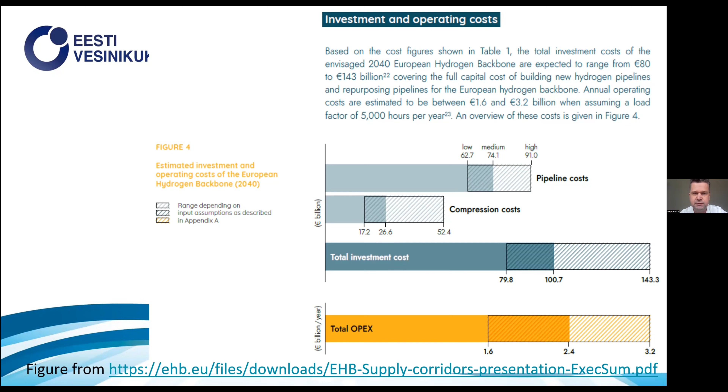In addition, there is now a lot of discussion about how much more expensive it would be to transport this large-scale energy in the form of electricity through cables. Different calculations and webinars propose that it's about 10 to 20 times more expensive to set up electricity transport infrastructure.

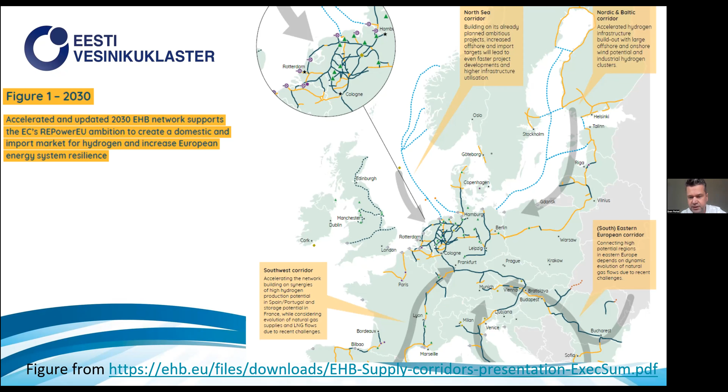Based on this, it seems quite clear that the large-scale energy transport from those areas towards Central Europe should be in the form of green hydrogen. Guidehouse, based on the European Hydrogen Backbone project, which contains approximately 30 gas TSOs across Europe - and from Estonia, Elering is the partner there - have proposed that already in 2030 there could be several hydrogen pipelines that help transport large-scale energy from those areas towards Central Europe, Germany, to support the energy independence and security of Europe.

Now, this was the big picture on the large scale. So if we know that this type of large-scale energy production will happen in Estonia, and hydrogen is the most cost-efficient way to store this energy and use it later on, then what we can do in Estonia is start to figure out how hydrogen can be used in our local context.

This means development of full value chains, where on one hand we have green energy production, electrolyzers, hydrogen storage. Hydrogen can be transformed into different e-fuels, for example sustainable aviation fuels or other types, ammonia, methanol. Then there's storage and transportation - how to get hydrogen from one point to another - and then there's end use.

In the Estonian context, and also if we look at Europe and other places like Asia, one of the most common ways to start using hydrogen in a local context is buses. We know that in Estonia there's quite a bit of interest towards hydrogen buses in some places, and these kinds of full value chains, which contain green energy production and hydrogen buses at the other end, seem to be the first use cases in the Estonian context.

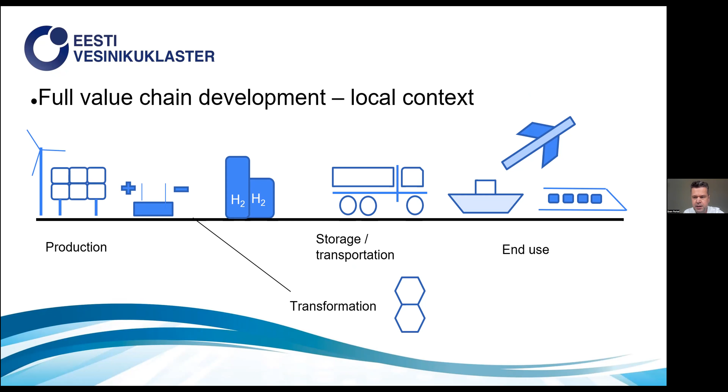But of course, maritime solutions are also interesting, and using hydrogen in aviation solutions has been discussed as well.

And based on this, over time we have proposed that to start the green hydrogen economy in Estonia, we should work with at least 4 green hydrogen full value chains at a time. Perhaps if there's more interest, also with other ones - but we see that Tallinn, Tartu, Narva, and Pärnu, and the islands that go with this, have been more interested in setting up green hydrogen value chains in general, especially Tartu, where there has been a lot of interest towards getting hydrogen buses on the streets as soon as possible.

And to understand that better, the cluster invited relevant stakeholders around the table, and we discussed what kind of value chains could we set up using the interest from those local companies.

At that time, we divided the stakeholders into 6 groups: production, transport and storage, end users, transformation, development of different hydrogen technologies, and of course, teaching of relevant competencies needed for setting up and maintaining a green hydrogen economy.

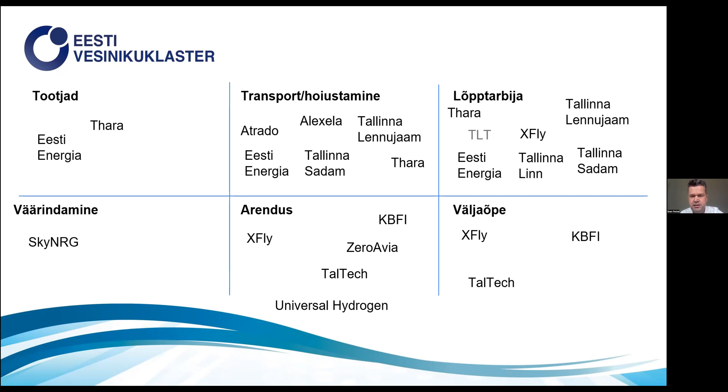We have done that also in other regions, for example in Tallinn, as well as briefly in Saaremaa. We see a lot of interest from companies, who realize that green hydrogen production, use, and participation in the full value chains is very relevant for their business.

Now we arrive at the discussion of how we're going to do this, because we are talking about a major change in how we produce and use energy in Estonia, but also on the European level. And these kind of big changes come with large barriers.

For this, currently more and more European funding is going into these projects, and Estonia has decided to support these projects with at least 2 investments. The first, 4.8 million, was tendered end of last year and won by Utilitas, who will use this funding to set up a full green hydrogen production and use value chain using their production facilities.

As far as we know, the use case here will be taxis, which will be put on the streets in Tallinn - green hydrogen taxis. The second measure, which should be opened end of this year, should give out 50 million to set up a full value chain, either in the transport sector or in industry. So this support funding will hopefully be available for Estonian full value chain developers quite soon.

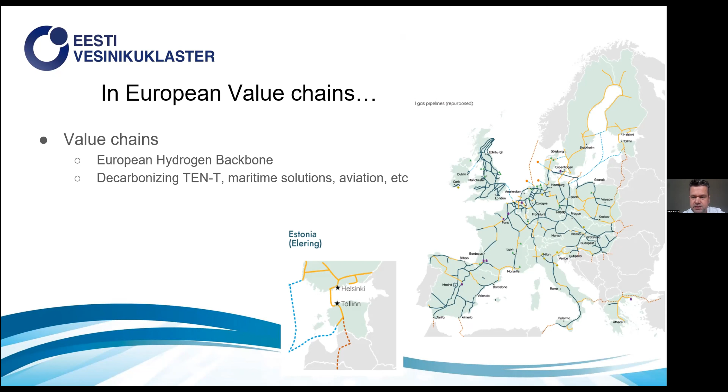There are also maritime solutions which will be decarbonized in Europe, and how to participate in that, and also in aviation, and perhaps other topics as well.

What we know is that a number of regions have shown a lot of interest towards setting up hydrogen full value chains already, as soon as possible - we're talking about Tartu, Tallinn, Narva region, and Paldiski and Keila have shown interest as well, in Pärnu and Kuressaare. Maybe the first users will not be in transportation, but stabilizing hospital work through hydrogen generators. But in general, the main focus will be on transport, and perhaps hydrogen buses and hydrogen taxis will be the first solutions.

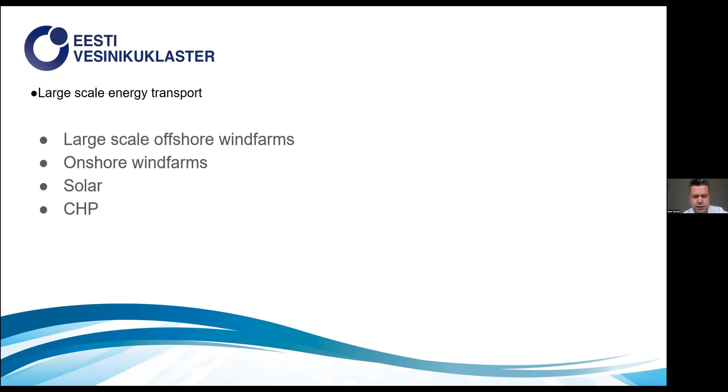So we have a range of options to produce green electricity and also to turn this into green hydrogen in the near future. When we're talking about local value chain developments and how those can be integrated into European value chains, we see that Estonia, the Baltic region, and the whole Baltic Sea area could become one of the areas which provide Europe with energy and participate in the energy security network. Developing a hydrogen valley based on this makes a lot of sense.

Hydrogen Valley is a flagship status given by Clean Hydrogen Joint Undertaking, and in some cases it may come with specific funding to develop this hydrogen valley and bring those value chains and companies together into a larger project, a larger development.

Altogether, there are over 30 valleys currently given out by the Clean Hydrogen Joint Undertaking, and they are evaluating those proposals as they come. Based on this logic, over the last year, we have jointly with the Finnish hydrogen cluster, powered by CLIC Innovation, developed and worked on a joint hydrogen valley between Estonia and Finland.

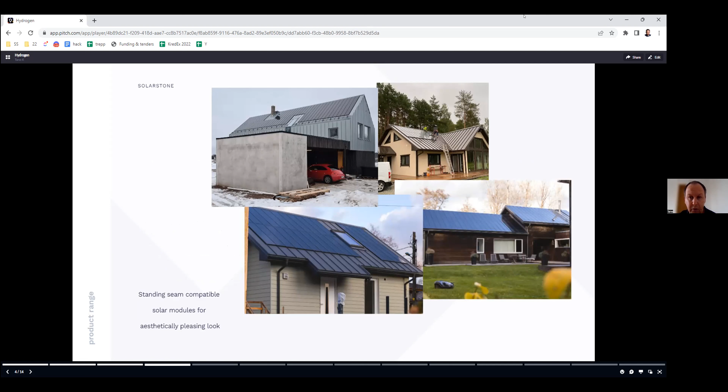We have 3 products in our portfolio. Firstly, an on-roof solution which is unique because it's not really on-roof, but very close to the existing standing seam roof. This product is enabled in, let's say, UNESCO and heritage buildings as the only solar option, because it leaves an almost natural look of the roof.

Then we have solar tiles, which are solar modules compatible with roof tiles, replacing the roof tiles while leaving the look of a natural roof, while actually the roof is made of solar.

The third product looks similar, except the modules are not the size of roof tiles, but large. In this case, we don't produce the solar modules ourselves, but have developed a certain framing set that is assembled around an existing solar panel. It doesn't matter which brand or size the solar panel is; this framing set enables us to turn a regular solar panel into building integrated roofing material.

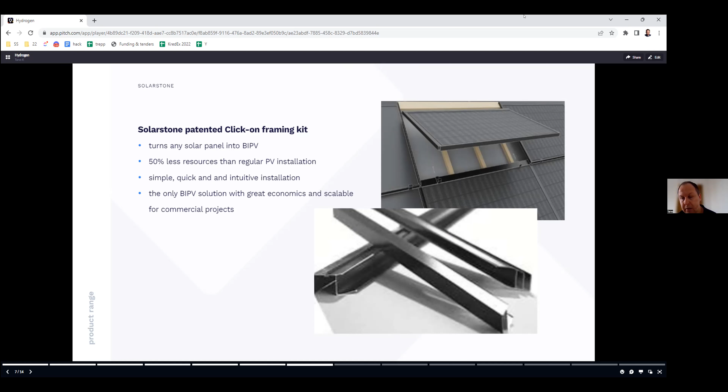It has great economics, probably the best in the world in terms of building integrated solar. This enables us to propose different kinds of solar-based solutions and business models on the market.

What I mean is, instead of installing solar where land is limited, we have a lot of existing infrastructure, like parking lots. We can turn parking lots multidimensional, meaning install solar carports and generate a lot of energy on site already.

Secondly, we've taken the structural hall model, which hasn't seen any innovation in the past 20 years, and replaced the traditional PVC or sandwich building skin with solar building skin, turning the structural hall into a large energy generating building.

The third is energy communities, where business models of pay and purchase can be replaced with services while using solar.

Speaking about solar and hydrogen, I think this is a very actual picture from recent times. What does energy security mean? You can produce energy somewhere far from where it's used, but if something hits, then you don't literally have energy, because it's not produced on site, it's produced off-site.

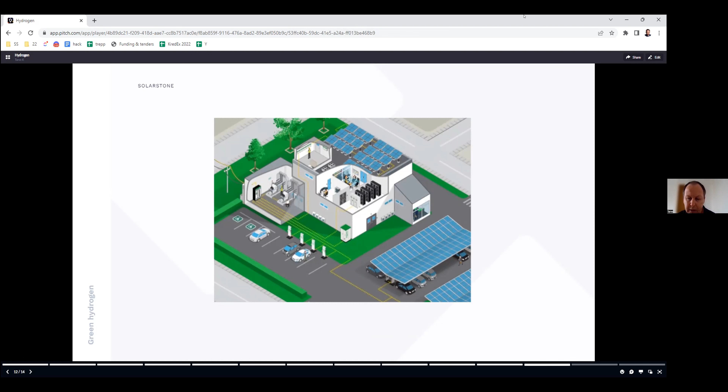It's of course a totally different aspect. I don't know the numbers yet behind compared to all the large utility scale wind, solar, and hydrogen combination projects. But again, as I started, we have a different approach than the general market has. The idea we are actually working on is to really use excessive solar energy on site for full year energy security and usage. That's pretty much it.

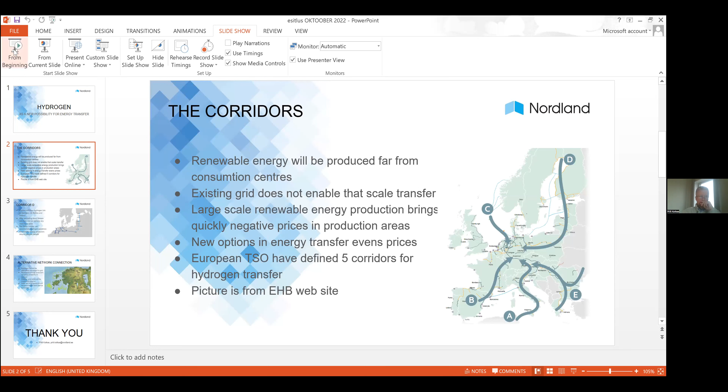I hope you see the files. As we worked during this process, Sven gave us an overview. We saw that the main challenge, or main possibility, for hydrogen in our corner of the world will be the possibility to transfer energy from our region to the regions where it is really needed. I'll show the same picture about the 5 main corridors and what exists today.

Apologies, we still see your first slide. Actually, I do see the second one. So what's the situation with others - do you also see the second one, or is it just me who sees the first? I see the first one also. We see your slides on the side, but it's not full screen. I'll stop sharing and do it once again.

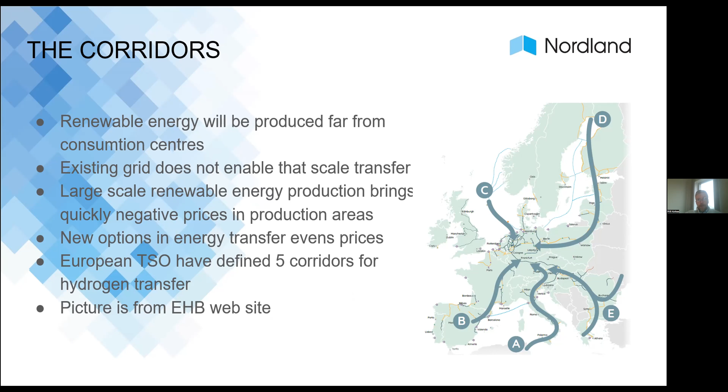I hope you see the second slide. Yes, we see the change.

We know that the same problem starts already from Finland, who is planning, according to today's wind park plans, at least 5 times more energy production by 2030. The same plans are in Estonia, the same plans are pretty much in Latvia and Lithuania. We also have our good partner Germany, who enjoyed Russian gas up to the year 2022. Today we are in the process of finding alternatives, and this is also a huge possibility for our region to provide this kind of alternative.

We have under planning, and in some stages under construction, an infrastructure corridor for railway - Rail Baltic. We have understood there is a possibility to use this Rail Baltic corridor for accommodating hydrogen pipelines. There were talks previously also about using a sea pipeline, after the Nord Stream explosion. This is probably an option for a pretty long period, but we have to have our energy connections and other inter-European connections in a mode that we can protect, with minimum possibility of sabotage. That's why this land corridor will definitely be the first alternative for this kind of infrastructure.

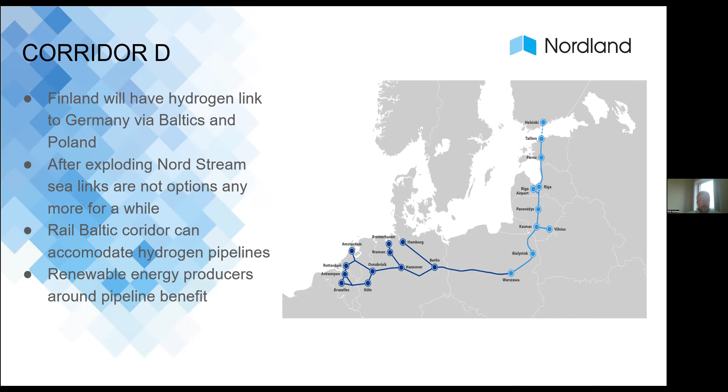It's also important that having the pipeline on the ground, going through regions with lots of interest towards wind parks and solar parks under construction, the pipeline will provide new possibilities for connection. It will be an alternative connection possibility for the producers.

What is good in the case of this kind of new energy transfer system is that we can send what we produce. We will definitely avoid negative prices in that case. And once we don't have wind and solar, we have a big hope that the pipeline works also vice versa, bringing us energy at a decent price.

So this is a quick overview of our findings during the last couple of years when we went through those local possibilities and tried to figure out the best usage of hydrogen in our region, where we don't have any industry using hydrogen. We believe that using it as an alternative network connection and transfer of energy will be a big chance for our region. So thank you.

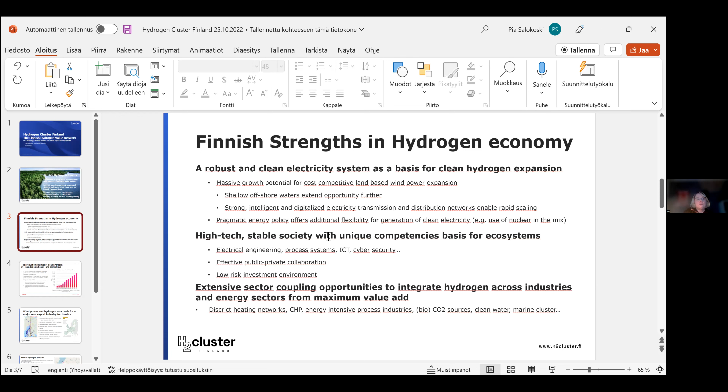But the potential for wind power is really big in the Nordic and Baltic countries, and also in Finland. Here are updated figures from that slide Sven showed. In 2030, there's already potential for 18 gigawatts in Finland, and most of that is still onshore wind. But of course, the offshore wind and increase of offshore possibilities will even increase these figures.

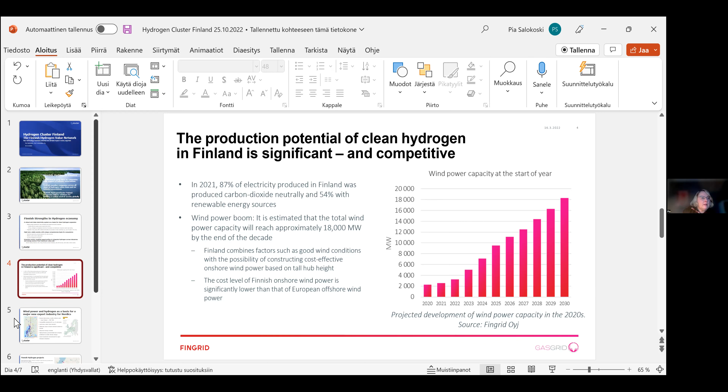And then those grid connections - there is already electricity and gas grid between Finland and Estonia, and there are a lot of different possibilities with these 5 corridors from the European backbone report, which have now been shown in many presentations. But when we made the calculations in the Hydrogen Valley project preparation, we noticed that the Baltic Sea countries can have a huge role in the whole European hydrogen economy and hydrogen market. So it's very important that we collaborate and work jointly, because there's really a huge amount of renewable energy and hydrogen production available in the Baltic Sea countries. And of course, collaboration on how to transport hydrogen from one country to another and how to utilize the hydrogen resources is very important.

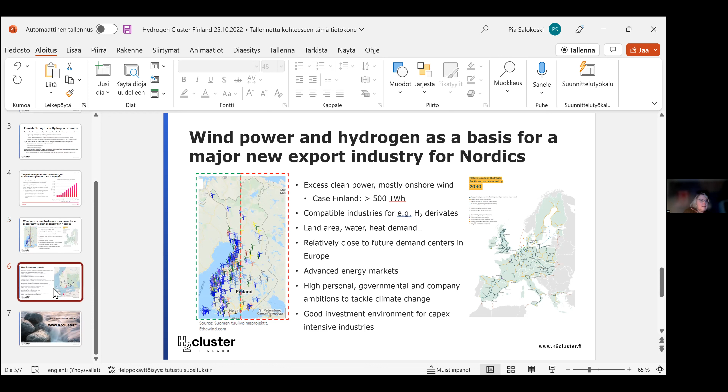Here you can see that most of the wind power potential in Finland nowadays is on the west coast and also the north, and the offshore possibilities are in the same area, maybe even more in the south part. But the Finnish hydrogen investment projects which are now ongoing are mostly in the south part of Finland. In the future, I see there will be growing amounts of hydrogen projects on the west coast and in the north, but nowadays most are in the south of Finland.

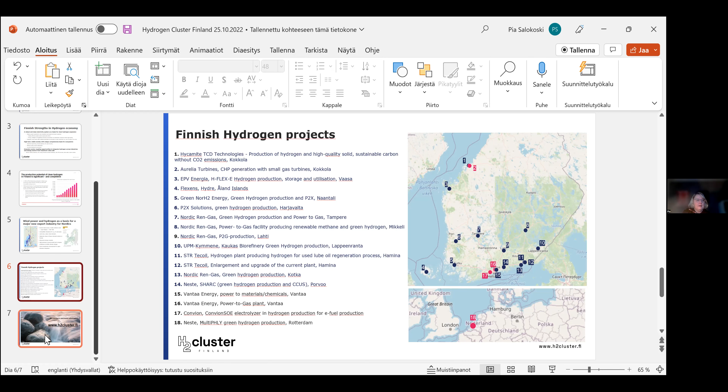But this was shortly about the potential for hydrogen in Finland and in the Baltic Sea countries, and you can read more about the Finnish hydrogen cluster from our webpage.

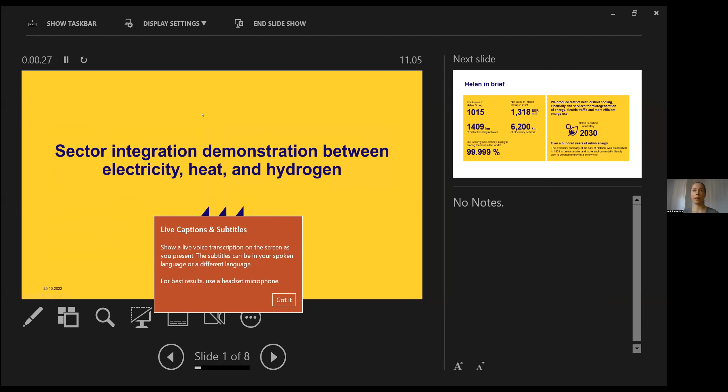We can already see your screen. I saw in the chat that you put Shift F5. Now we can see the presentation mode. There's a live captions and subtitles text box pop-up that we see. Did you see the presentation or the wrong screen? Now it's better, we see the full screen - we see the presentation mode, not the full screen. Do you see the next slide as well? It's fine, we still see enough of the slides, but just to let you know we also see the other side. That's fine, it's big enough, I think.

So sorry about the hassle. My name is Heidi Ahniemi. I'm a business development manager at Helen in the hydrogen team, and our team is now working on our first concrete hydrogen investment project. In this project we will demonstrate sector integration between electricity, heat, and hydrogen, and this demonstration is part of the Baltic Sea Hydrogen Valley project, if that realizes - and of course we hope it does. I think that this sector integration could also be replicated in Estonia, as you have district heating as well.

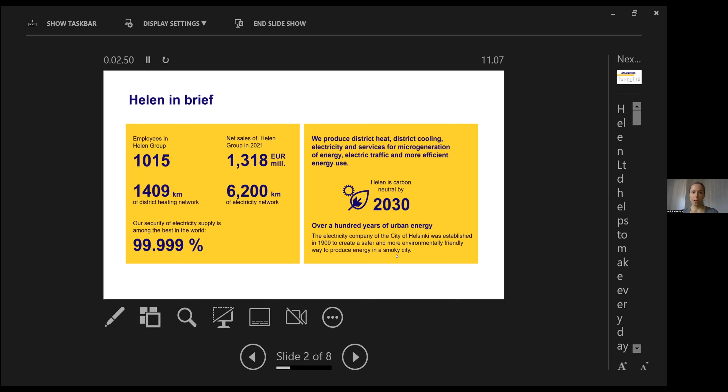Maybe more about our services and how we have organized our business. So as I said, we have these more known and traditional services: distribution, electricity production and sales, heating and cooling in district heating and cooling networks in the Helsinki area.

But in addition, we have been growing in the service business, meaning that we provide solutions for local energy production, meaning solar PV, for example, smart buildings, including energy efficiency and ground source heat pumps. Then electric transport, so we're expanding our EV charging infrastructure. And then on the right-hand side, we have this new solutions division, which I'm in.

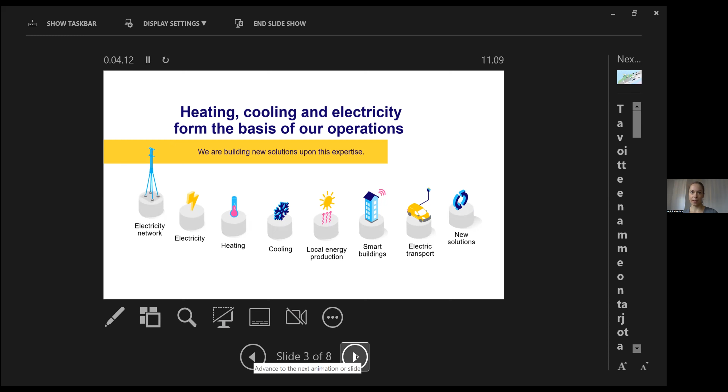This kind of platform aims to create new businesses for the future, including flexibility and hydrogen. So what could be Helen's role in the hydrogen ecosystem?

Well, we see that our natural role would be mainly on the upstream side of the hydrogen value chain, if you will. So sourcing the clean electricity from renewable production sites, but also maybe nuclear and hydropower. And then we would aim to produce hydrogen and sell it further to our customers.

But in the meanwhile, we aim to maximize the flexibility of the hydrogen production and utilization of the byproducts. So, of course, waste heat, excess heat is something that is very natural that we can use, but also maybe in the future, also the oxygen that is released in the electrolysis, and we could maybe use that in capturing the CO2 from our bio-based heat production.

So far, we don't see that we will be active in the end-use sector, but we'll see how it goes. But now we're focused on the upstream side.

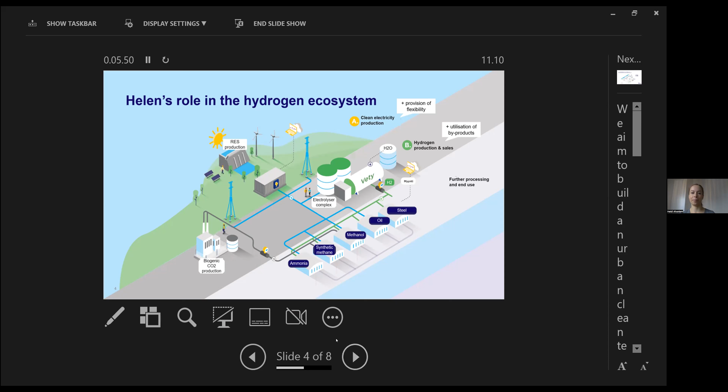So here's the vision picture of our first project. The acronym for this project is 3H2, Helsinki Hydrogen Hub. And it's located in Vuosaari, Helsinki, where we have our district heating production assets as well. There's a harbor close to our project site, and therefore it's a very interesting location.

And this first small project is our first step towards the vision of an urban cleantech hub. So we have a vision in which we are a large hydrogen producer, very close to the Helsinki city center, in which we maximize the energy efficiency of the process, meaning that we really take all the excess heat that is available and utilize that in the district heating network.

We aim to maximize the flexibility. So consider the intermittency of the electricity production, also flexibilities to produce district heat or not to produce it, and also provide flexibility for the end user. And the last point is scalability. We want to make a concept that can be replicated in the Helsinki area, but elsewhere as well.

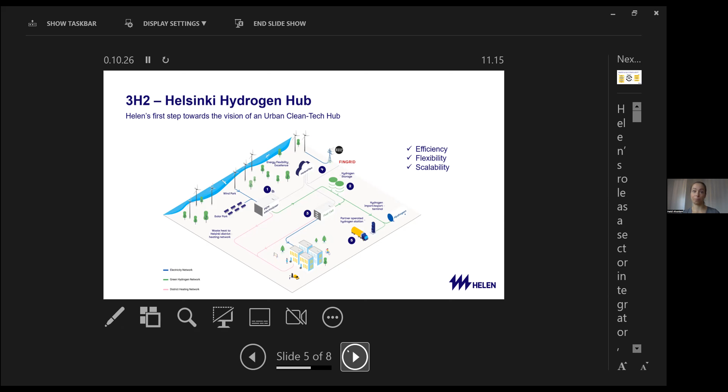So we have a range of inputs that we will feed into the algorithm. The inputs include the hydrogen storage level, hydrogen demand forecast, electricity price forecast, wind and solar forecast. I forgot to mention that we will have solar power on the site, and we will source wind power through the grid. We will have a flexibility market forecast, so reserve prices, heat demand forecast, then heat production cost of alternative methods, for example bio-based heat production, technical constraints of the components, and there might be other inputs like hydrogen market price.

The hydrogen market is not something that is there already, but in this Hydrogen Valley project, we would develop a demonstration market for hydrogen, so we could play with the price as well.

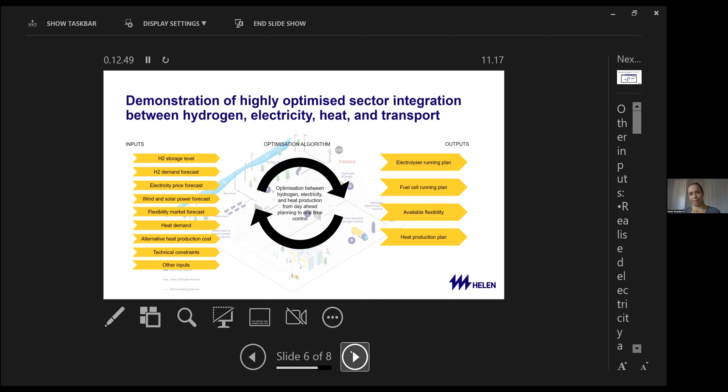Based on the learnings that we get from this demonstration, we are confident enough to scale up our hydrogen business so we could go into bigger projects with maybe less risk, as we know the technology and know how to operate it.

Thank you. This was it. Would you have any questions?

Thank you, Heidi. Very impressive to see how you are thinking about the role of hydrogen in just not that far away from us. So it was very impressive to see. Do you have any questions to Heidi at this stage? Or any comments? As has already been said, you can write it in the chat as well if you don't want to ask it live. So thank you, Heidi.

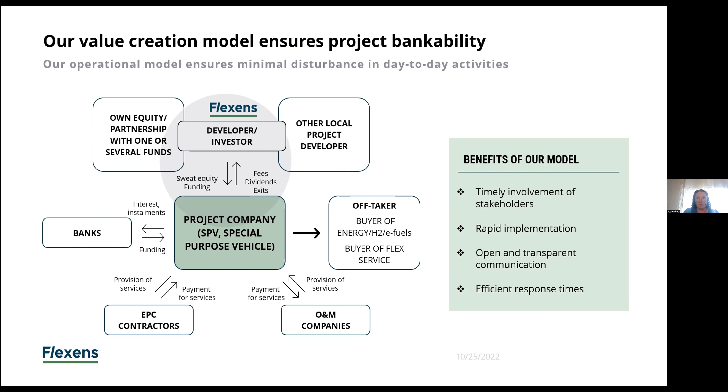So in this specific proposal now, we chose to focus quite narrowly, since in an R&D project you can't put in too much, because otherwise you won't get anything done. So here we decided to focus on hydrogen supply and storage to passenger ferries, and we decided to look at those operating from Helsinki.

So that's basically our focus. So the actual, let's say bunkering of the hydrogen, and that will be connected to some sort of storage solutions as well.

We will do a lot of stakeholder involvement with both shipping companies, the ports, and any other relevant stakeholders in the beginning of the project. We already have quite a lot of contacts and activities with ports, and we have also done an energy analysis of one of the bigger ports in Finland, so we have increased our know-how in that aspect.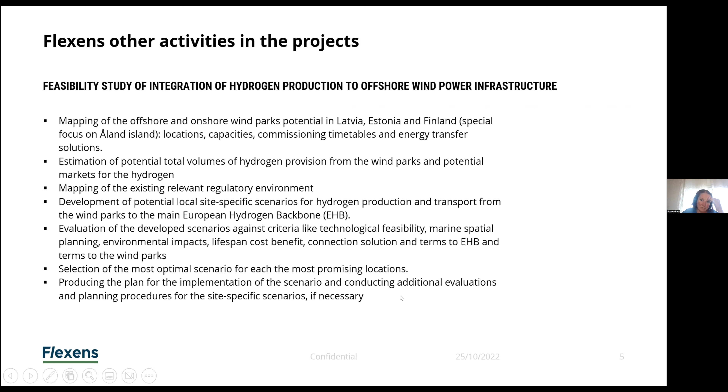I'm thinking, was there something else I was supposed to highlight here? Well, maybe I could highlight also doing this scenario analysis, whether the offshore wind production should be through power lines or through onshore hydrogen pipelines connected. As we heard in the beginning, we already know quite a lot, but it could also be a case-by-case analysis there.

And I realized now I really rushed through because I understood that we were a bit behind schedule. So I thank you, and here are my contacts - you can ask for more information.

Many thanks for this great overview of the potential, what you see, and more specifically what was already refined in the framework of putting together this joint proposal for this large consortium. So, do you have any questions to us, or any comments at this stage?

You can either write it in the chat or please raise your hand if there is anything. I think Tonu Karu is physically raising his hand there. Oh, I don't see the videos. Okay, don't know. Yeah, I also see that Tonu probably has a question.

You are muted. You're muted. No, you're muted. Okay, can you hear me now? Yes. Thank you for their beautiful presentation from Åland, from Mariehamn. Yeah, well, I'm in Helsinki actually - actually, I'm in Vuosaari, quite close to the port. That was - yes, I know where it is.

I have had the privilege to represent the city of Tallinn in the European Union for 10 years and cooperate in the framework of the Union of the Baltic Cities. And I am a bit guilty for some of the hydrogen activities in Estonia. First of all, thank you for your beautiful presentation. Point two, and may I make a bit of a dirty joke - take it as a joke - but for all the speakers and all the audience, when you come to your screen, please draw the curtains, because as a physicist in the field of optics, I cannot see your beautiful faces because of the hard white light behind you. Yeah, now much better, okay. You just made a good point about cooperation requests across the Finnish Gulf.

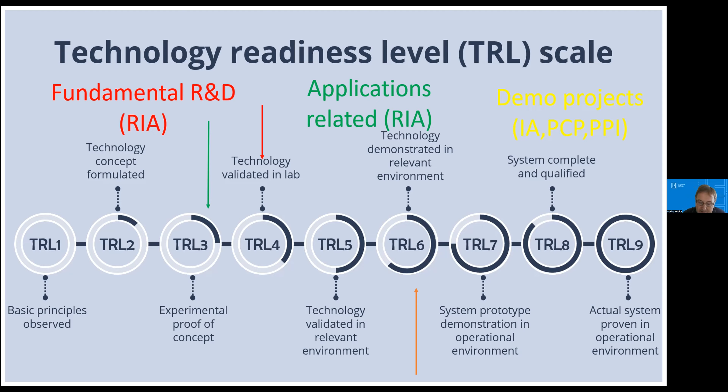The activities on hydrogen are concentrated in 5 institutions in Lithuania: Vilnius University, Lithuanian Energy Institute, Gediminas Technical University, Kaunas University of Technology, and Vytautas Magnus University.

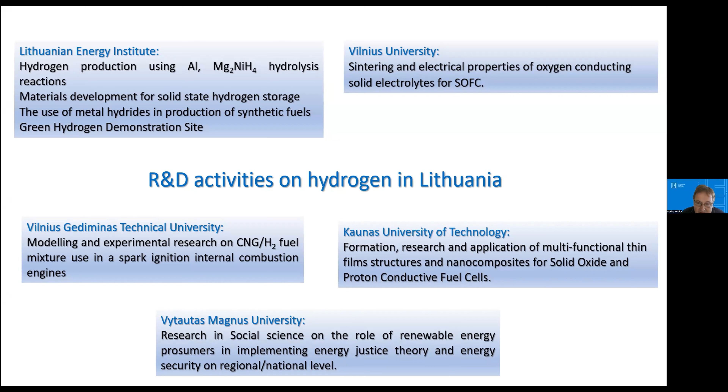In detail, at Vilnius University we are working on fundamental research on transport of lithium and sodium ions, oxygen vacancies, and protons in solid-state electrolytes. We are developing solid oxide fuel cells, some micro fuel cells, and trying to understand the charge effects in these materials. This is our oldest group in Lithuania, with about 40 years of experience and lots of national and international projects behind them.

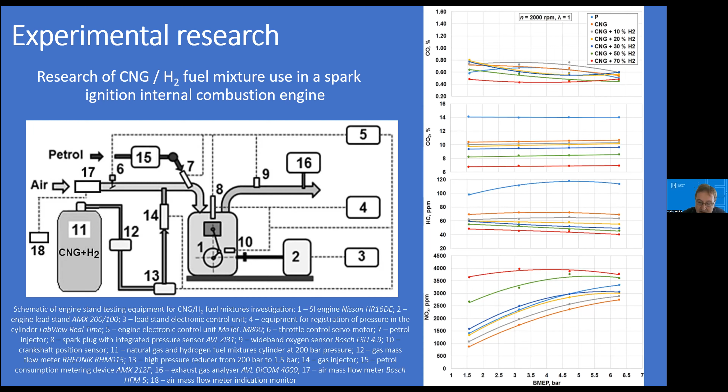At Gediminas Technical University, we have a very interesting project related to applications, mixing compressed natural gas with hydrogen at different levels, starting from a few percent up to 70% hydrogen. We do modeling activities and lots of experiments in the lab, and we also work with industry people. The fuel mixtures they develop are used in buses in Lithuania - actually 3 cities are using them today.

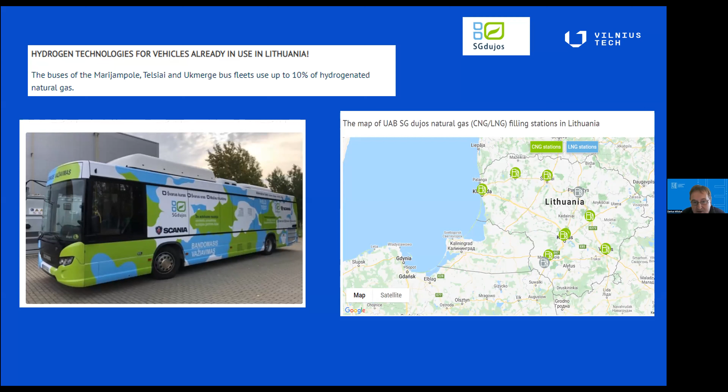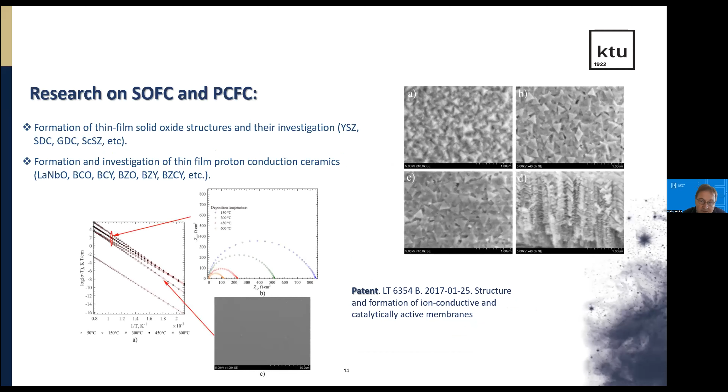Kaunas University of Technology has another group which works on development of materials for solid oxide fuel cells and proton-conductive fuel cells. This is rather fundamental work - we are trying to develop membranes for both types of fuel cells. Here you can see examples of different membranes developed by various groups.

Vytautas Magnus University, located in Kaunas, is more focused on social science. We are trying to understand the role of renewable energy prosumers in implementing energy justice theory, and also the role of different technologies - batteries, hydrogen - in the implementation of renewables in the market.

There is also a small group on energy security at the regional and national level. This is mainly mathematicians, and we are doing analysis of energy security levels, applying different indicators and trying to understand how changing technologies influence energy security.

Lithuanian Energy Institute is actually my lab. Let's start from hydrogen production. Here, instead of electrolysis, we are working on hydrolysis. We are trying to understand if it's possible to use aluminum waste to produce hydrogen, and later on electricity, and also some useful heat which could be used in other applications.

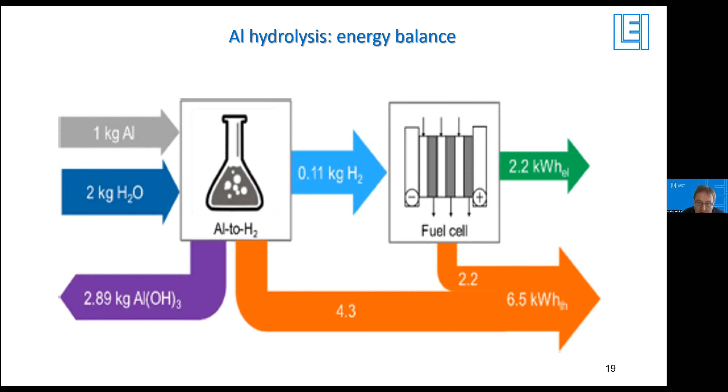If you use 1 kilogram of aluminum waste and 2 kilograms of water, we can produce up to 2.2 kilowatt hours of electricity and 6.5 kilowatt hours of heat. Additionally, we can produce up to 3 kilograms of aluminum hydroxide, which could be converted to other useful materials.

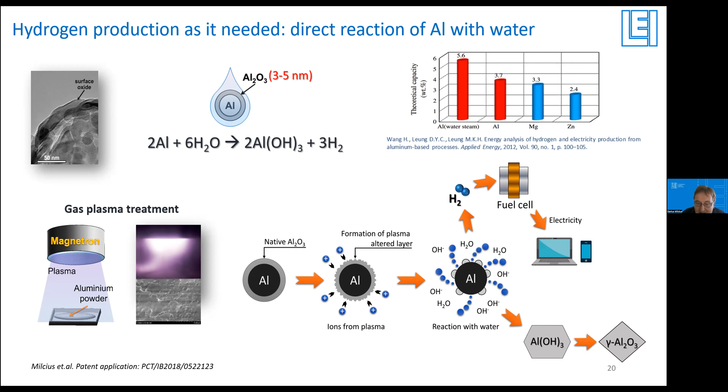The main challenge with this technology is related to the physical fact that when you expose pure aluminum to atmospheric air, it will already be covered by a thin aluminum oxide layer which prevents aluminum from reacting with water. So we developed a few technologies. One of them is patented worldwide, which allows us to change the aluminum oxide layer properties using a green chemistry approach. This altered layer allows aluminum particles to react with water, and we can easily produce hydrogen, which with the help of fuel cells will produce electricity, and also we can produce aluminum hydroxide and gamma aluminum oxide at the end of the day.

Another research area we are doing is related to solid-state hydrogen storage materials. We work a lot with Stockholm University, and these are examples of magnesium-based materials which could be used for hydrogen storage, smart window devices, and biofuel applications.

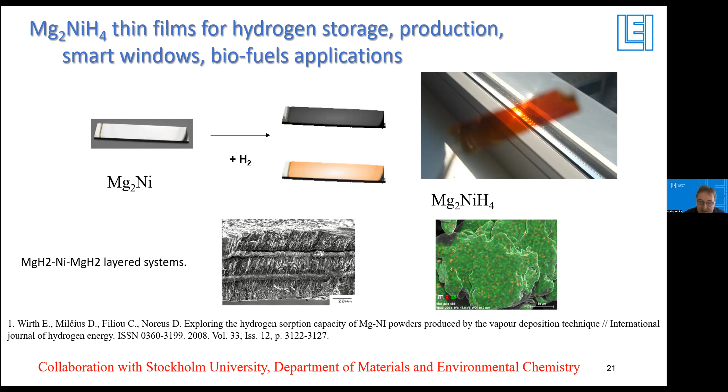Developed materials - I'm talking about Mg2NiH4 powders - could be used for hydrolysis processes. If we immerse them into water, the reaction starts and we can produce hydrogen at a very stable rate, even for a few hours.

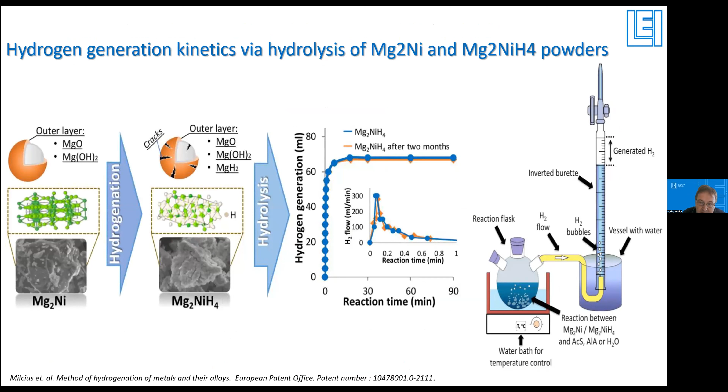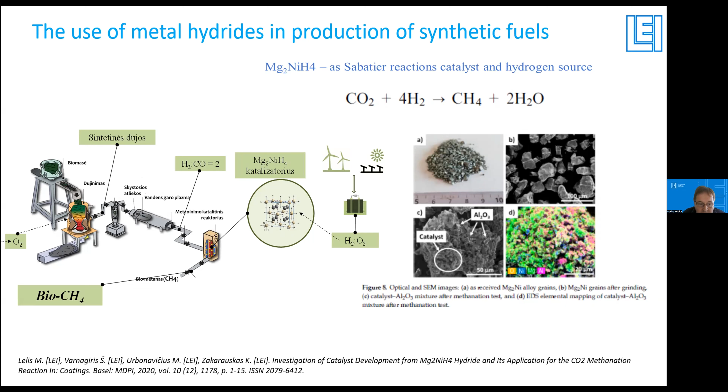Metal hydrides for synthetic fuels - this is very interesting work which we started about 3 years ago. If you work with biofuels, you know they have lots of CO2 and little CH4, and it would be very useful to increase CH4 and decrease CO2. So how to do this? We are trying to develop different catalysts for Sabatier reactions, where CO2 reacts with green hydrogen and we can produce CH4. Here you can see examples when we use magnesium-nickel nanoclusters together with aluminum oxide. This allows us to convert part of the CO2 to valuable CH4, increasing the value of biogas.

So this is our latest development. You prepared and submitted a very nice proposal on large-scale hydrogen valleys, and we prepared a small-scale hydrogen valley. So this is approaching, very briefly.

So we have green electricity, which is solar and wind. And we are going to install up to 6 megawatts in power electrolyzer at our biggest ammonium fertilizers factory, Achema. If we are successful, it will produce up to 800 tons of hydrogen per year, which will be used in green ammonium production and also in blending hydrogen into our natural gas grid. So we expect that it will give us the possibility to test different technologies.

When we talk about green ammonium production, the amount of green hydrogen produced is very small. In terms of Achema, it will be around 1%. However, when we talk about blending hydrogen into the natural gas grid, it will be up to 5% for the Kaunas region. So it will be very interesting experiments.

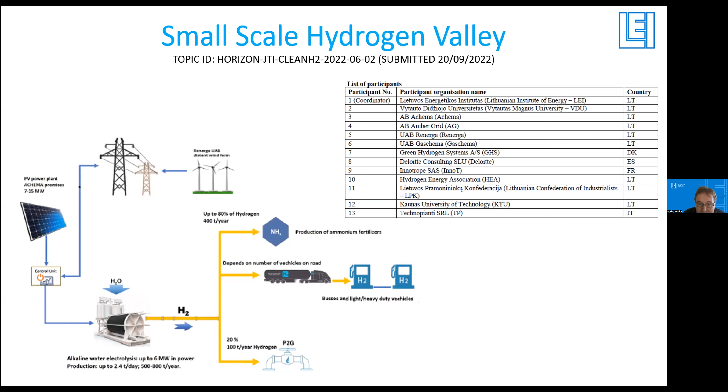Thank you, Darius, very insightful. Great to see those R&D projects that you have in house. So there's a lot going on. Do we have any questions or comments to Darius?

If not, then I will ask one myself. Do you already have a timeline? If there is no publicly available hydrogen gas station in Lithuania, do you have a timeline for when one could be available? What I'm asking is that Latvia has had one for some time now. We don't have one in Estonia that's really usable in this sense. So what is the situation in Lithuania? Do we have a race here?

Yeah, so our Ministry of Energy developed the first value chain, which is related to transportation. We devoted 20 million for that reason. Four fueling stations will be placed in Lithuania, in Kaunas, Vilnius, Klaipėda, and Panevėžys, such are the plans. And the calls will emerge next month. We expect that the installations will be finished maybe in 1.5 years' time.

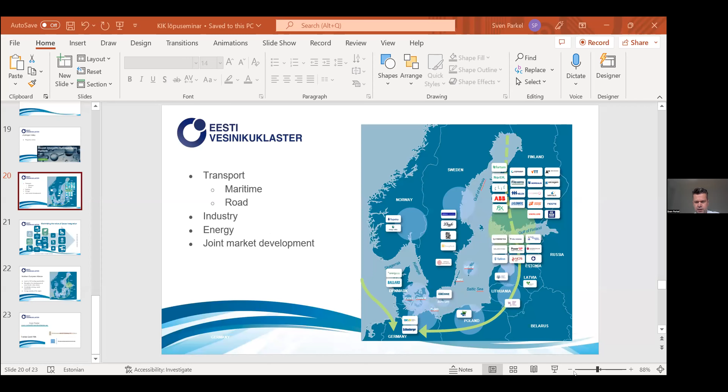If not, then just to wrap up this seminar, I would come back briefly to a couple of slides I already shared during my presentation. So the point of today's webinar was to tell you a little bit about what is happening in Estonia when we're talking about full value chain developments. We had 2 demo cases to show you: one was hydrogen in the built environment, the other was large-scale hydrogen transport.

The third sector that we've been working with, including, for example, Tallinn City Transport — a representative from Tallinn City Transport could not join us today — they are working on how to integrate hydrogen buses into their bus fleet, and this is also another very interesting value chain development.

And as a cluster, talking with other stakeholders across Europe, we see that there are many regions with similar topics and similar issues. So bringing them together as a consortium, with the support from CLIC who is heading this consortium, to apply for large-scale Hydrogen Valley funding from the EU makes a lot of sense. But this is just one snapshot at the time.

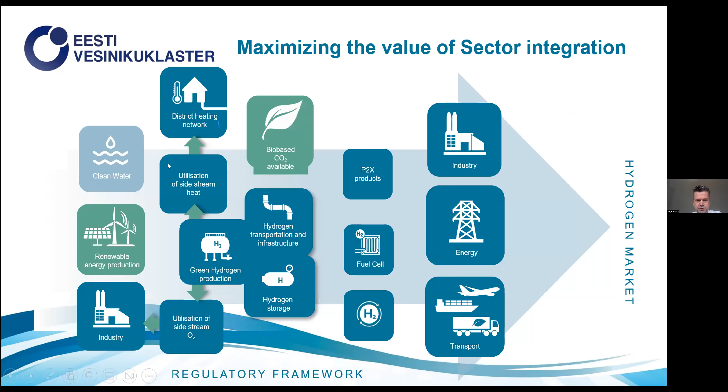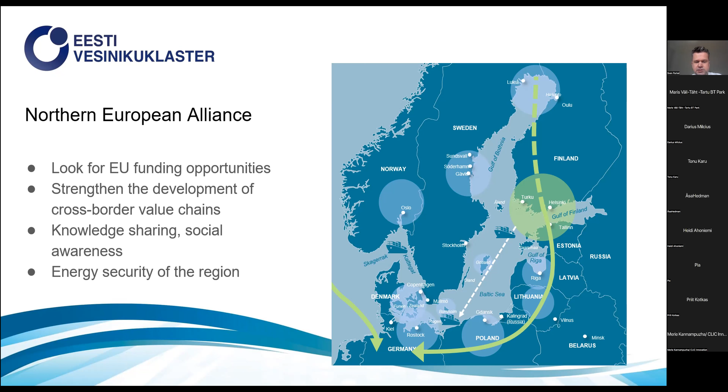So of course we hope that this consortium will be funded, but we're not only waiting for this, we'll continue to develop this region further. CLIC has, from the Finnish side, initiated a Northern European Alliance which would focus on both green energy topics and green hydrogen topics, to find additional funding for those projects we already encountered during the large-scale valley proposal, but also going forward, working out more and more the cross-border topics, cross-border value chains, knowledge sharing, social awareness, and overall to provide more to the energy security of the region.